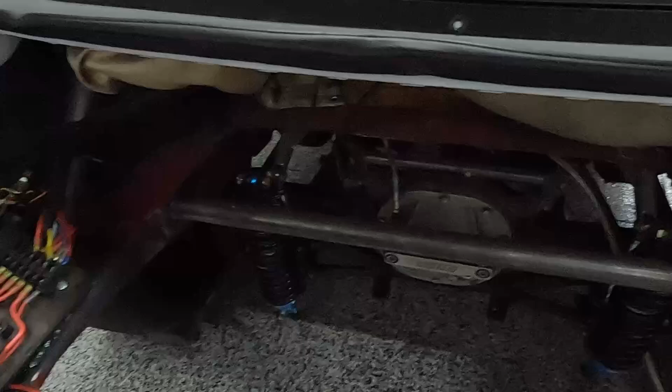So I've done a little bit of preliminary measuring, and I'll take you under the car here. The idea is we are going to build a bar that drops down below the frame rail, goes across, and we are going to mount the cell onto it. Then we will have to come up with a mounting system at the front, something similar.

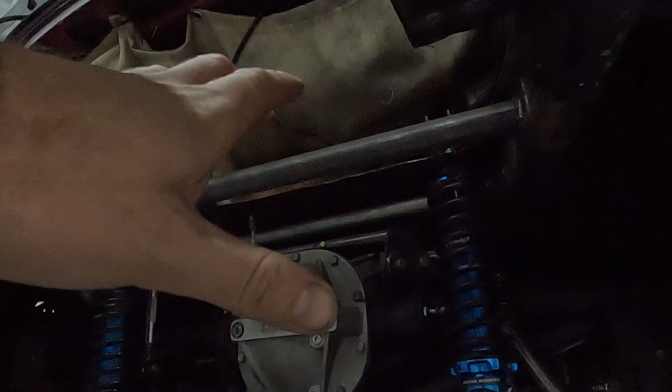My thoughts here are I want the cell a bit lower. I don't want it super high up in the trunk, I want it to really drop down. So the cell and the battery are going to sit back here. I'm just going to get straight to it, enjoy.

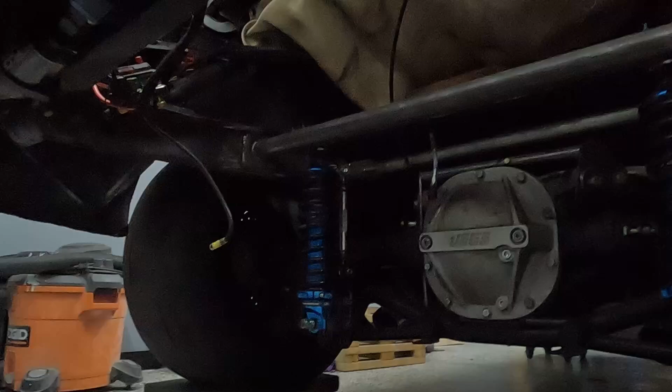All right, so here's our back bar. See, the plates are welded on each side, and we'll go put it in the car.

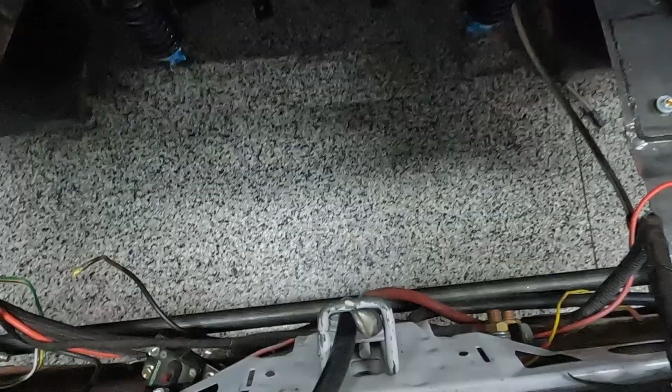Okay, our new bar is in, and now we just have to connect the dots and get our fuel cell in here. So I will tell you this much, I did have another bar that I built with saddles and all kinds of fancy stuff that mounted on the bottom of the frame rail and was down lower. It was a little too far forward, I got ahead of myself. Cell didn't fit properly, so I had to cut all that out. That's why I've gotten so little done, because I wasted a whole bunch of time there.

But as you can see, these two bars are actually fairly close in height now, and we have enough room between the two bars to drop the cell in between it. So we're going to run the cell tied up against this horrible piece of plate that I've ruined, and it should be good.

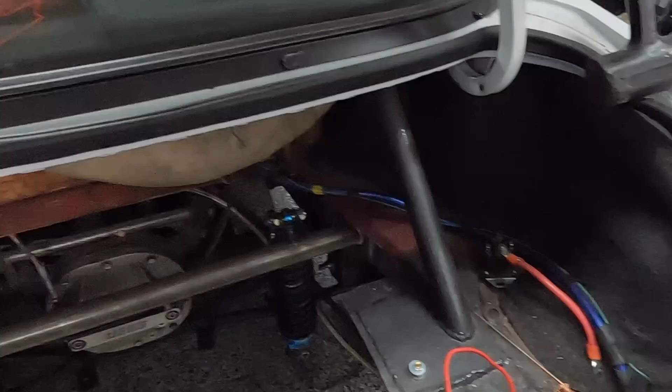One pro tip for you: MIG welder, welding against frame rails, is a lot better, because I got super frustrated and angry trying to use the little guy over there and TIG weld up against here because I had no gas. Definitely not doing that again. So this is going to be essentially a MIG job from here on out. I'll try to TIG onto the bars, the spots where you can see, so it looks pretty.

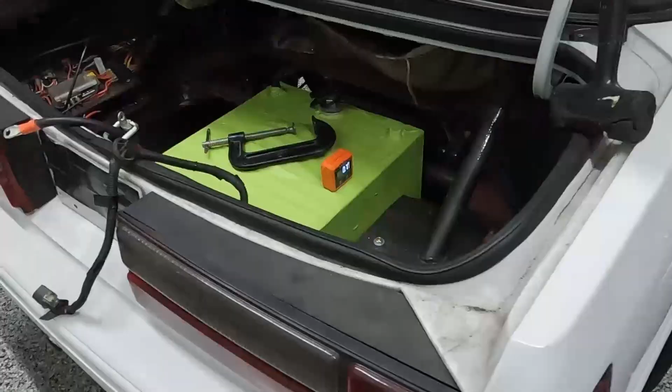So yeah, I'm going to mock the cell up in the car now, and we will see what we can do with that. Alrighty, so we've got the fuel cell in the car, more or less where I want it, and essentially level. We can work on the fine details later.

But now the trick is going to be how we build something to support the cell. So obviously we've got the sump back there. Ultimately I want to run my lines out of the back of the sump, and I'm going to mount the pumps down here. I'm going to have to get a second one of these guys.

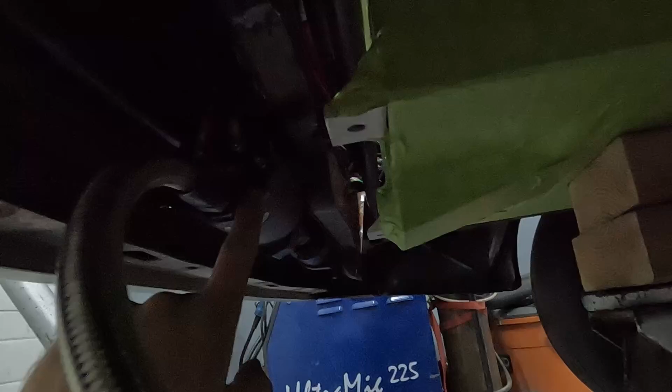So what that looks like is I need to essentially build a piece of tube that comes down to the bottom, along the underside of the tank and up to the top, and the tube will sit on the inside of these brackets, and then we will have some tabs off the tubes that bolt the cell down to it. The cell will essentially be supported on the tubes, and the tabs just hold it there from moving around left to right. I'll take a few measurements here and we'll start cutting some tube.

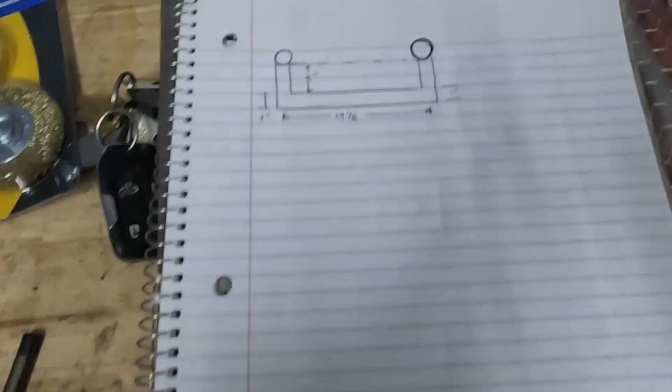Alright, so I did some measuring, and I actually had to double check myself by putting a level under the two tubes, but miraculously these two tubes sit at exactly the same level at the bottom, which is awesome.

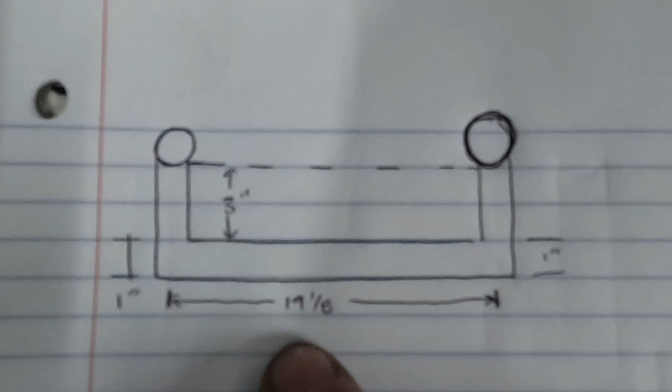So I want this bar to drop down 3 inches. So this piece is essentially 4 inches from where the notch touches. This one as well will be 4 inches. We'll have some 45-degree miters in there, and then we're about 19 1/8 on center, which I will confirm after I have both of these pipes in and plumbed.

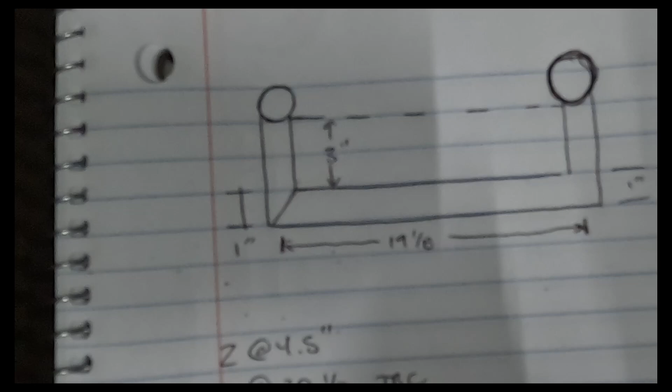All right, so because we know we want 3 inches essentially from the inside—this is really to the bottom of our notch, how I've marked that on the pipe—cut ourselves a short piece with a 45, have my set square up here, moved it so this bottom edge is flush.

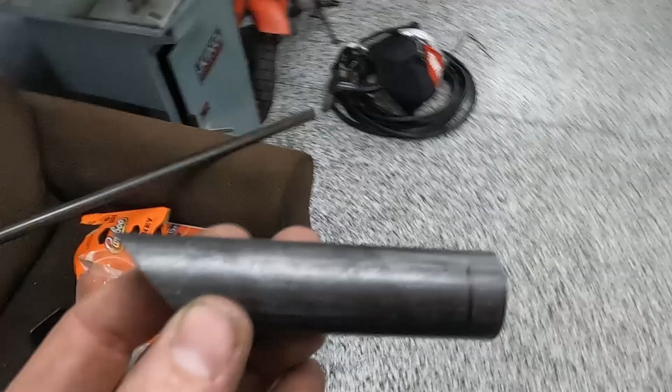Obviously I can't do this with one hand, but I already marked it, and then our 3-inch mark comes in there. So now I know that's the bottom of our notch, which is great. All right, we've got our piece of pipe cut. This inside mark, the only one you can really see where my pinky is, that's my 3-inch mark. Outside of here, I have gone 1/3 of the pipe diameter, so 0.3 inches longer.

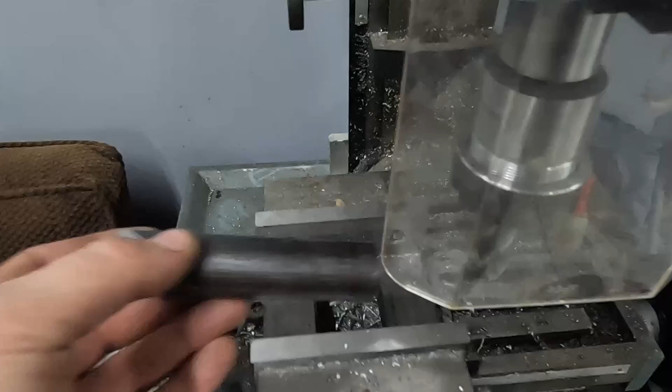What we are going to do is use the milling machine to make a little notch in the pipe, because I'm not good at doing this manually. Lots of people can do this, I can't, but there are videos on how to do it without any special tools. What I'm going to do is square this piece of pipe up in the vise, and I am just going to notch it using the milling machine with a 3/4 inch bit. This needs to be a 1 inch, which I don't have, but I'll just have to smooth over the edges afterwards, and we'll see how it turns out.

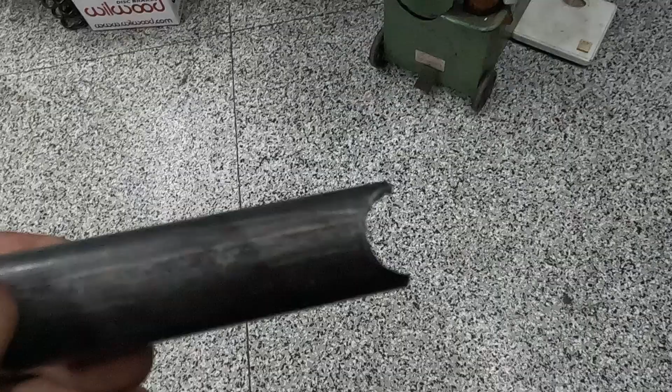Okay, so there is our notch. We are right at the line, so I will just take a flap wheel and flatten this out a little bit so it fits up nicely on a piece of 1-inch pipe, and then we will do it again.

All right, quick little update under the car. I've got the rear tube essentially just hanging out here with the magnet. I've got the front with the magnet. I've measured the distance from that one to that one, and it's about 20 5/8 of an inch outside to outside. So I will miter that tube up and we will mock it up and see how it looks.

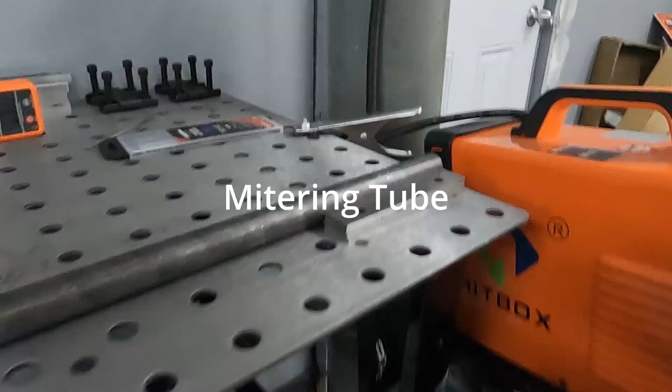All right, we've got these parallels. They are set at 1/2 inch, so I will essentially just mark along the pipe here, and that's going to establish a center line the whole way.

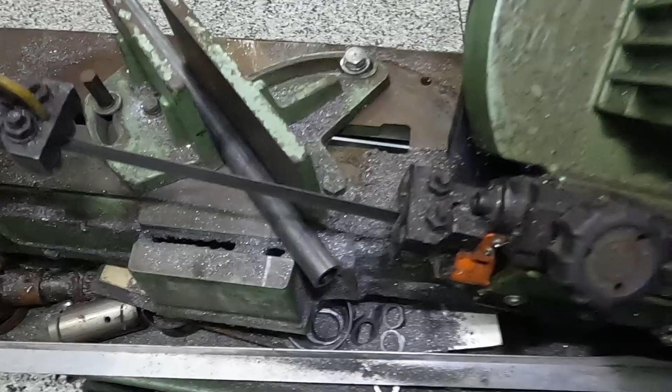Okay, I've got the pipe in the vise, and sorry, it's really hard to see the angle here, but you'll see I've got the line marked with 1/2 inch. I marked the vise 1/2 inch off the base there. So this line now, I can cut this 45 and I can rotate the pipe 180 degrees, and I'll make sure that those two 45s are phased perfectly, and that will make things a lot easier.

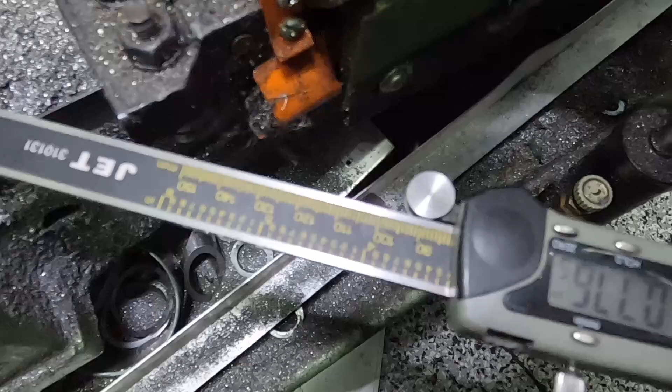Now one more thing, because I want this bar to be exactly 20 5/8 of an inch long, what I can do is I can measure from the edge of the bar to the vise, and I get 0.776 inches. So now I know I mark the long end of this pipe at 20 5/8, which is the overall length I want. I make this mark on it at 0.776 inches, and then I just line up my mark on the bottom with 0.776 inches out, and my pipe should end up being exactly the right length.

Okay, so here are my two marks. That one is the 20 5/8, and that one is where the pipe should sit against the vise. And this line, obviously, that's the one that I line up with the 1/2 inch mark to keep the phase of this bend correct, or this miter.

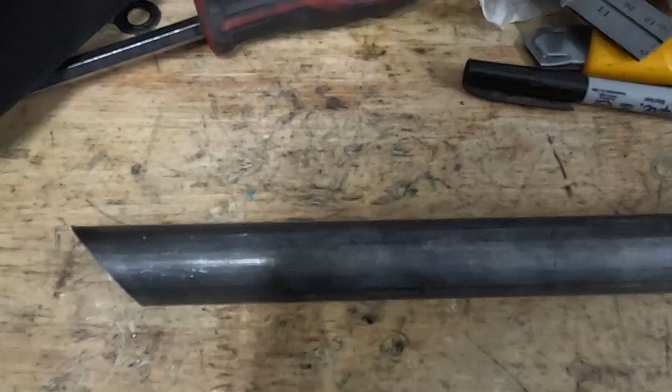All right, pipe is cut. You can see we pretty much split our cut mark down the center, which is unreal. There's the vise mark. The two miters now are perfectly phased. The only reason I'm showing you this is because I wasn't doing this earlier, and that's why I had so much trouble building the first bar. So we will cut a couple more pipes and go on from there.

All right, so what I got here is a piece of tape which I wrapped around the circumference of the pipe. Let me just show you something here. Just one sec.

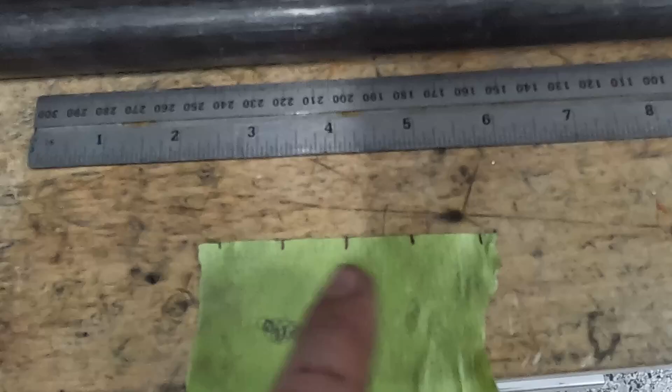So I wrapped a piece of tape around the circumference of the pipe and then divided it into 4 parts. Essentially mark a line, wrap it around the pipe, mark a line on the other side of the tape, unravel it, and divide this up into 4 pieces. Go back to your mark on the pipe, wrap it around, and put 4 marks on it, and this is going to be for our notch.

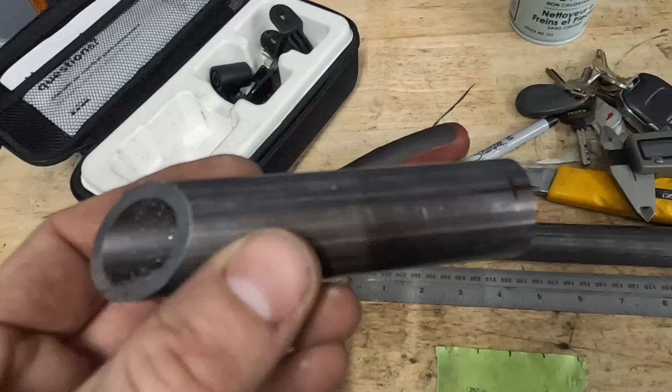Because I'm mitering this end, the notch has to be in the correct spot, obviously. This piece is going to sit on a piece of 1 5/8 pipe. So I will mark out the notch and show you what I've done.

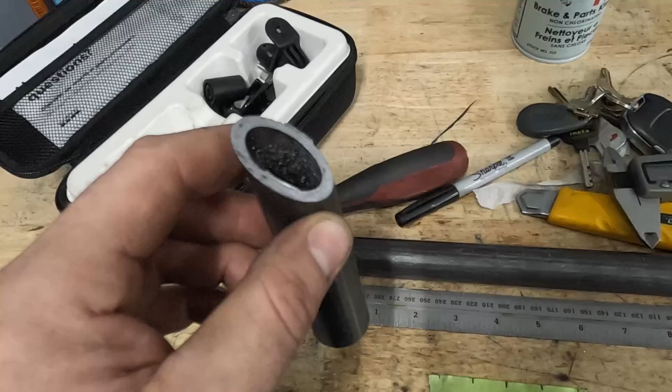All right, so here's what I did. I essentially put the pipe on here, and you'll see on the side here, that gap was like around 4 millimeters. So on the pipe, I marked a 4 millimeter spot. Each one of these marks is at 4 millimeters, and all you do is take your 4 marks and connect the dots. These are just straight lines.

What I'll do now is take an angle grinder and grind out all this spot in the middle here, and that will make the saddle for this to sit on. There's a little bit of fine tuning after, but this works pretty good. This is what really frustrated me yesterday, to figure it out, and once I figured it out, it's been going better.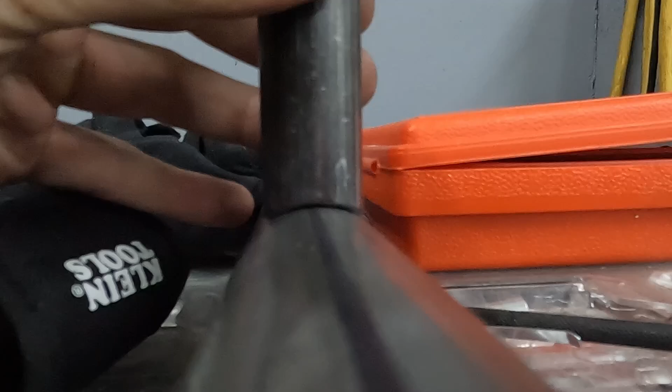You can see that worked pretty good, it's a pretty tight fit up. It's not perfect, but it's good enough for this. So what I'm gonna do now is tack all these bars together and go mock it up on the car. All right, got her mocked up.

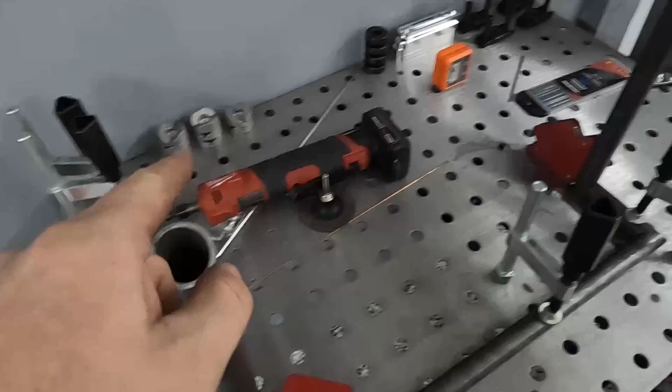Shout out to Princess Auto, which is kind of like Harbor Freight but the Canadian version. Got this new welding table for 200 bucks. It comes with all the clamps, fixturing - those are V-groove clamps, there's spacers for them, bolt down stuff. But I can pretty much mock this whole thing up right here, tack it together, and make sure I get the notches oriented right, and then we can try it on the car.

Well, it didn't fit, so I cut it, and then I cut it too much, and had to add some back. But all in all, not too bad. So we'll put this in the car, and I guess we can start mocking up the fuel cell.

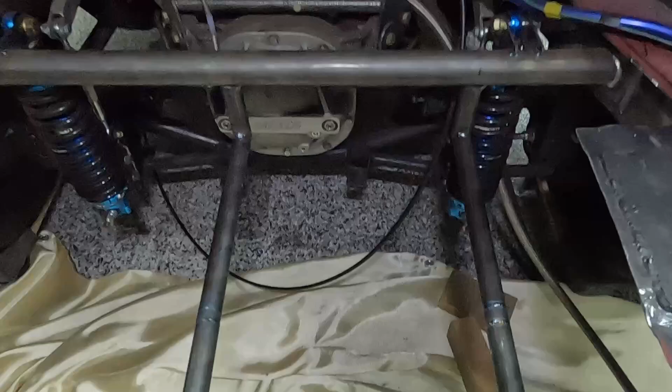Okay, and those are the 2 bars in there now. See, they are tacked up and they're going to allow the fuel cell to drop down. Now, unfortunately, the orientation of the tabs on the fuel cell isn't correct, so we're going to have to re-weld those, but see if we can fit it in here.

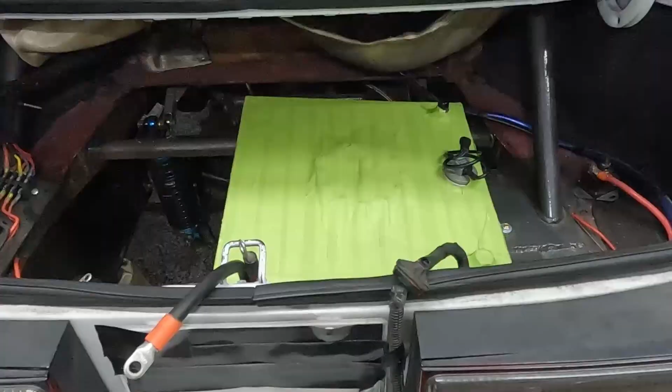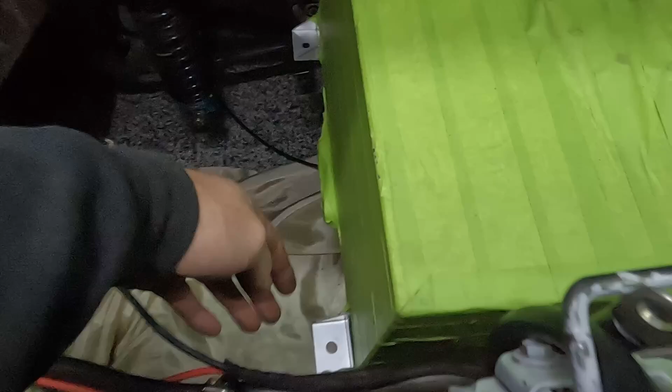Okay, first mock-up, obviously the tank is sitting on the sump. This sump needs to rotate this direction. Obviously this whole tank will be spun 90 degrees, and then those tabs will go on the sides, but you can see now kind of where the tab will mount.

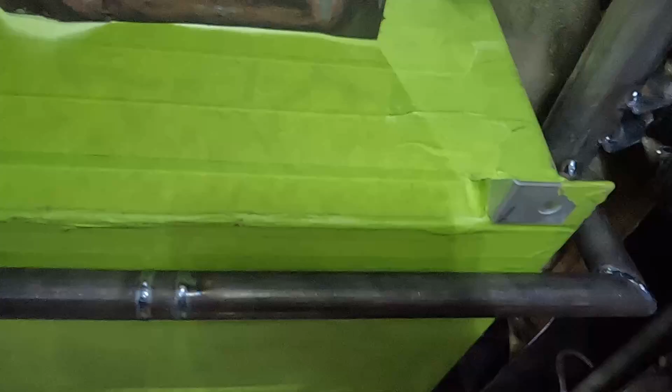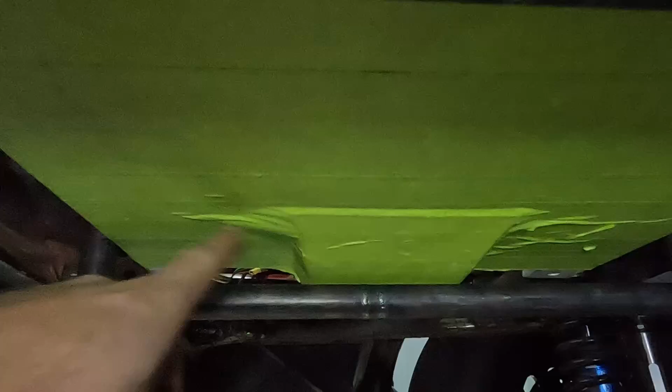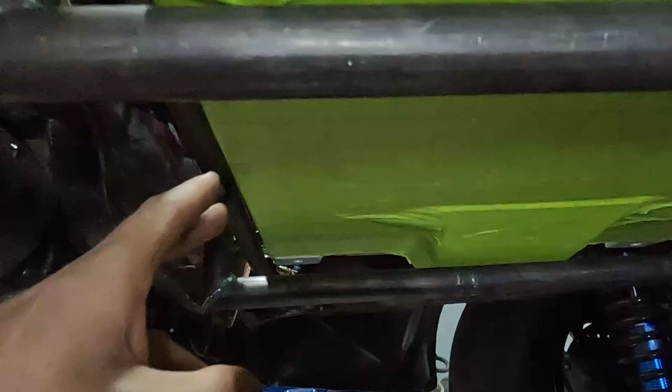Show you under. So under the car, we'll have to center the cell on here, but we'll make some tabs off of here, and that's where the cell will bolt to, and the bottom of the cell is obviously going to be supported by here, and again that sump sitting down is going to be out here, and this is going to be further forward, so the sump is going to hang out right at this point here. The interesting thing is, this tank is a square, so with this all the way forward, I know the sump is going to sit exactly here. So that gives us a bit of space for some fittings.

And I'm thinking my fuel pump, I'm going to need a second one of these guys. I'm thinking we'll make some more tabs under here, and we'll mount the 2 pumps right under here, and each line will come out of the sump and feed them.

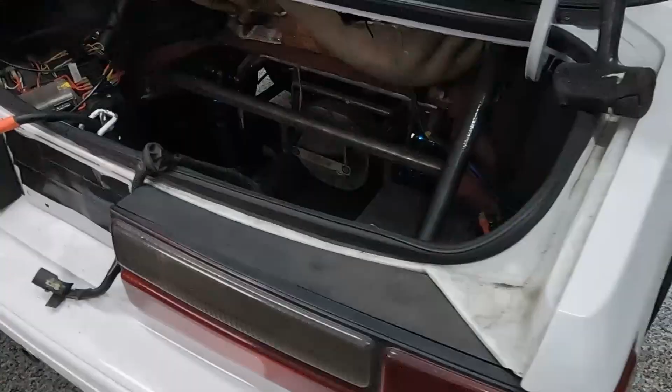All right, so for the cell to fit in the trunk, the tabs need to be on the sides at the back, and the front we can have the tabs facing this way. So what we've got going on here, I have welded on just some plates to build it up here, and now I'm gonna make a little tab that comes off the side.

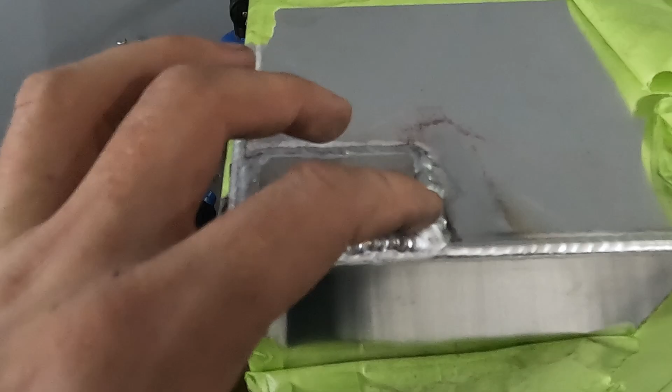And yes, it looks like a little kid welded that, but it's really hard for this welder. It's welding, this is 1/8 plate, to 1/8. So I'm like preheating it with a torch and stuff. It seems to be working.

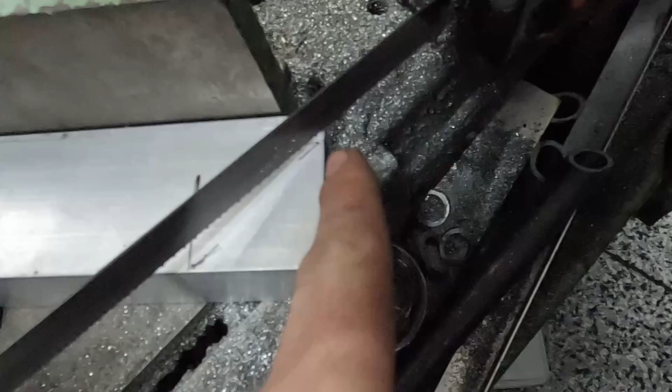It's gonna hold at the end of the day, but it's not beautiful. This end is obviously open. It's gonna give us a tab that's about 1.5 inches tall. The straight part will stick out, and this is about 2 inches long. So this will weld to that backer plate I had.

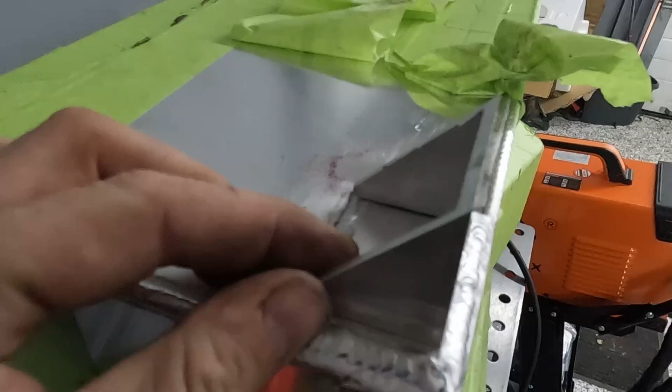So this is our new tab, and it's just gonna hang out on there, and I will do my best to weld it around, and hopefully it sticks.

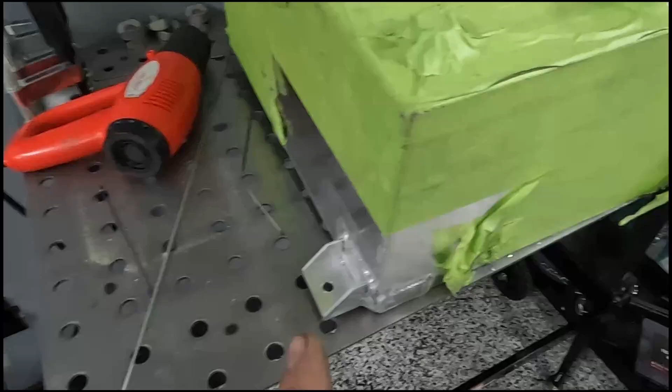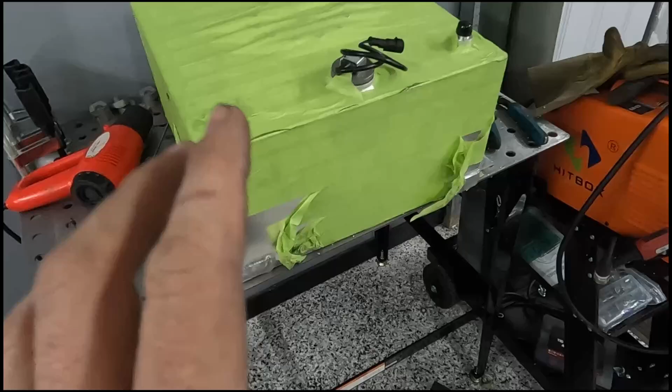All right, these are done. They look good from the top. They look absolutely terrible from the bottom. This little guy, he struggled. Truthfully it was probably me and not the machine, but that 1/8 plate to 1/8 plate on 1/8 plate is not good for a little guy like that, and someone like me who doesn't have a ton of aluminum experience. But they're there and they're stuck on, and the tank's going to be supported underneath with straps, so really these are for shear support side to side. We also have 2 factory welded tabs up here as well, so I'm not concerned at all about the safety of this cell. It's just kind of one of the ugliest things I think I've ever welded.

All right, so we have now got the cell in the car, and you can see now it sits down nice and low, which is what I was hoping for.

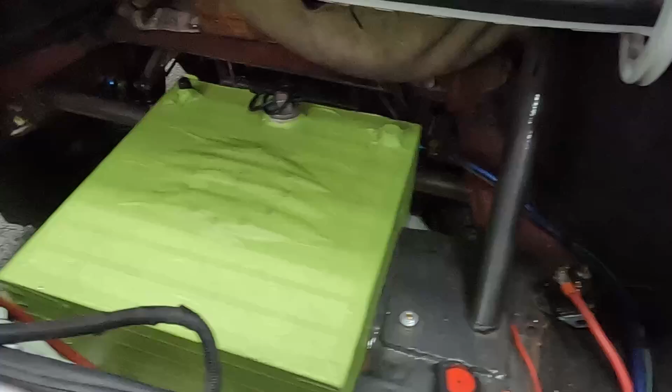And under the car it looks like that. We've got 2 bars, and we'll just need to make some mounting tabs off of here. But I think that's pretty straightforward now, and overall I would say I'm happy with it. So I'm gonna make some mounting tabs for this, and then we will go on to the battery.

I have got the second tube welded on and in place, and I've tacked these in a couple different spots, played around with the cell. The idea now is that this bar is going to help support the battery as well. So let me put the cell in and we'll have a look.

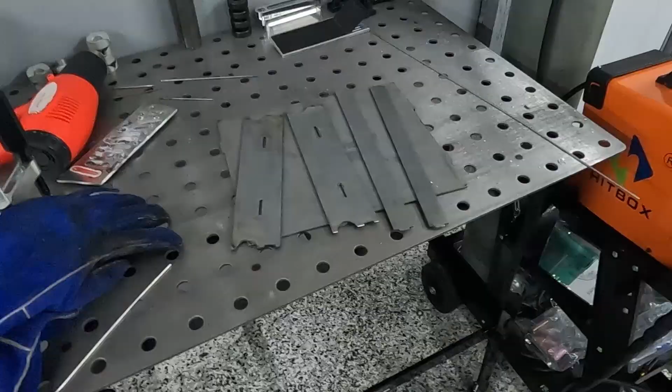Alrighty, on to the battery box. Now I made this in CAD, and my buddy Blake Lyons over at Lyons Autocraft, who's actually going to be LS swapping a DeLorean soon and starting a YouTube channel, cut these out for me. What I've done is, this is a battery box, and it's going to sit between my 2 rails back there. The tabs essentially clip in. So this should be a pretty interesting piece, and I'm pretty excited to try it out.

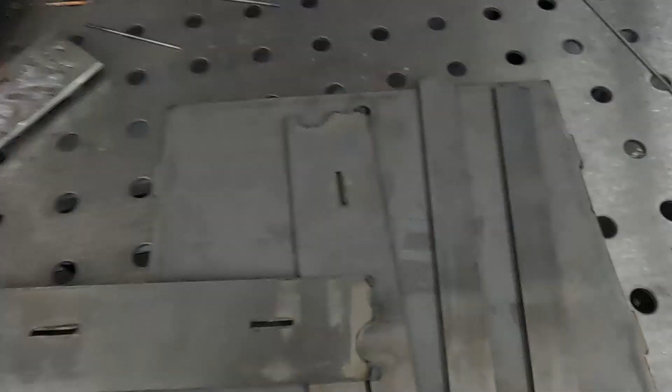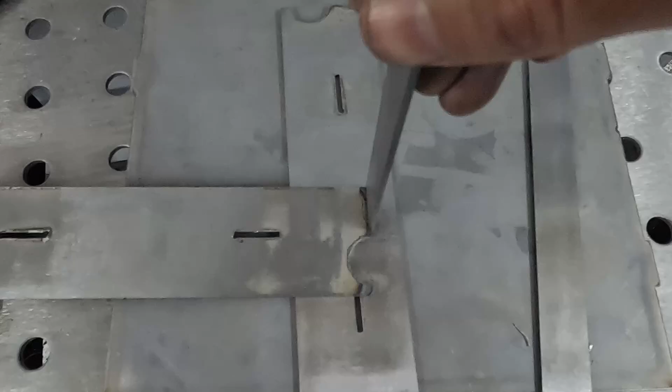So let me show you how this gets assembled. You'll notice these little square notch-outs that don't look square from there, but the pieces essentially will clip in. Essentially I will tap this all together with a hammer, tack it all up, and we will have ourselves a battery box.

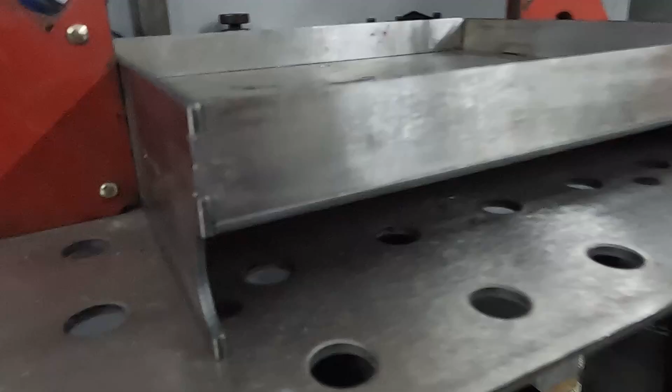Alright, so here we are. Got everything tapped together here. This is actually insanely good. Look at how the edges meet up there. Pretty surprised this is working as nicely as it is.

So I'm gonna go ahead and just tack this thing up and then try to figure out how I actually want to weld it.

Alrighty, there we go. So what I did is just a couple stitch welds, miscellaneous stitch welds and corner welds - sorry, that chair is very noisy - but that's what we ended up with, and I am very, very happy with that. So thanks again to Blake. When he starts uploading videos on his LS DeLorean build, maybe I'll direct you guys over to his channel. He's just got to make one.

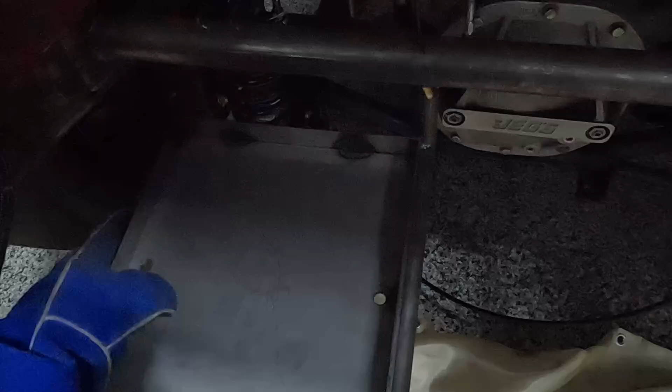And in the car, that's how this looks. It'll sit on this bar, and I'm going to make one more bar by my left index finger over there. But yeah, that's the basic idea.

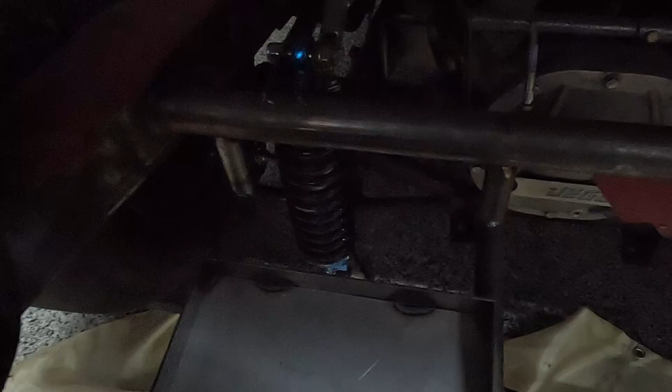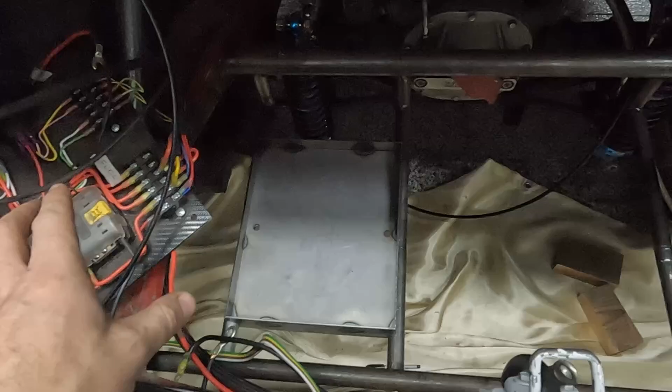Okay, we're almost done with this nightmare. The last bar tacked in, which is this guy here. You can see the battery tray fits super nicely in there. I just measured it out. My fuel cell tab is going to go right there and right there. So yeah, that's pretty much how this trunk is going to look. We'll have to figure out what to do with this wiring and how to rearrange everything.

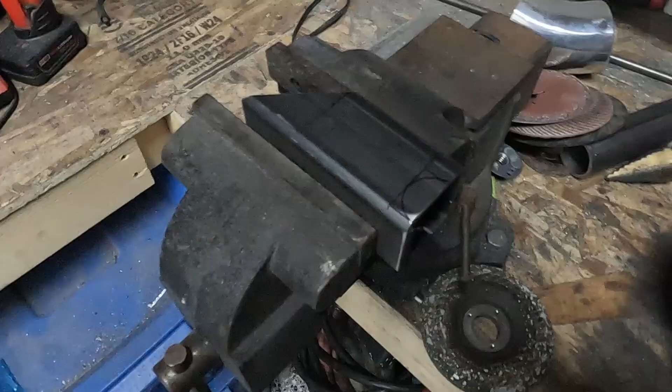Alright, just making some tabs here to mount the fuel cell to the tube. You can see I've got our mark for where the tube needs to go. What I'm going to do is cut a whole bunch of thin slits with the zip disc, and then we'll grind it out smooth, because I don't have a hole saw that size.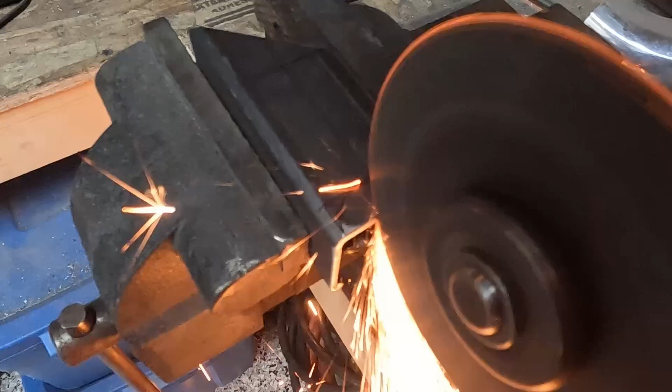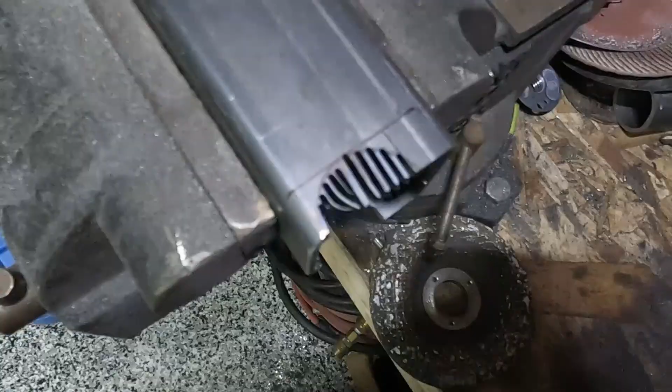And that is what that looks like. Now I will just use the grinding wheel essentially, and you'll see these tabs will just come out like nothing.

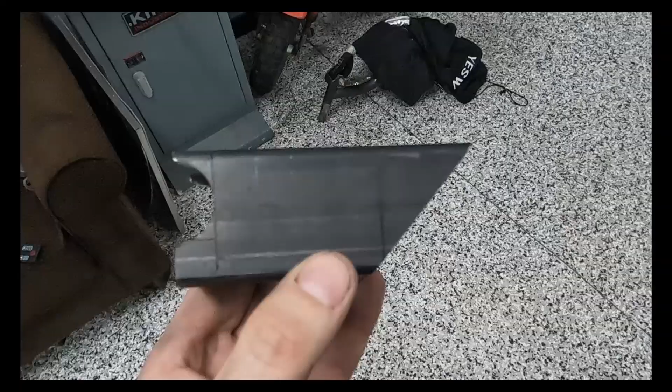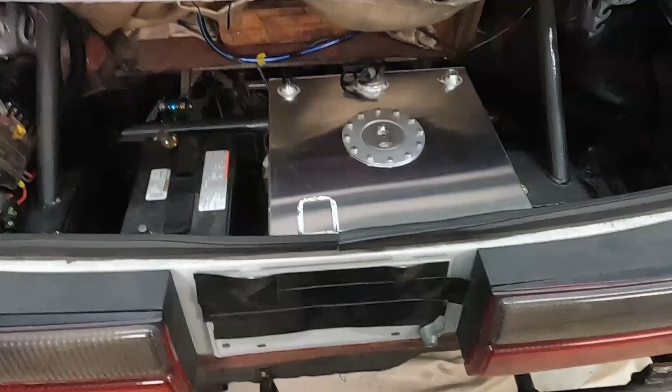Alright, tube is notched, so we can go and tack these into the car now. A bit of finishing work off camera, but this is essentially the final product. So you can see I got everything just painted in here. This is that Tremclad hammered paint. So this is kind of the final product. I went through and painted the bars and everything in here with this hammer paint. It always works out super nice, and it almost looks like powder coat.

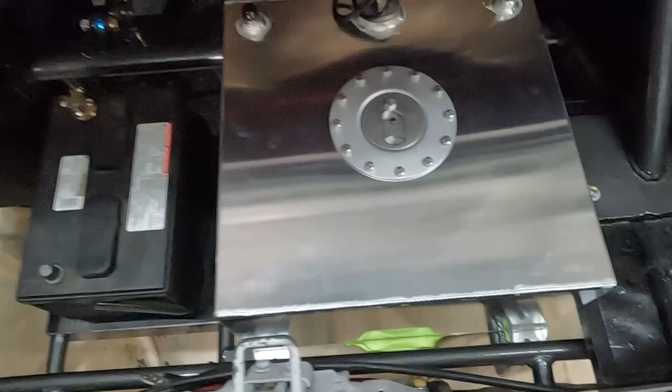So you can see we've got the battery sitting in the tray. I still need to make a little hold down for it, but that's no problem. The tank is in, you can see it's sitting on some mounting tabs I put in. So that all turned out well. This thing sits nice and low, which is what I wanted.

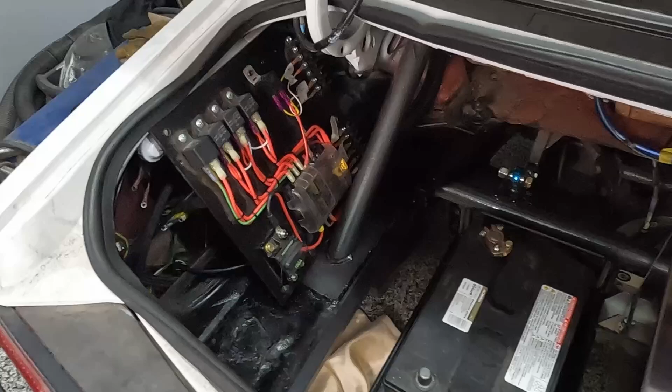Our electrical panel we will mount over here somewhere. I have a ton of wiring and stuff to rejig back here. I also need to run some wires from the computer back. So I'm gonna have to figure out when I want to do that and how I want to do it.

I also trimmed out the edges just with some aluminum angle iron, just to soften them up so they're safer. You can brush your hand against it and you won't get cut, and it just looks a lot nicer.

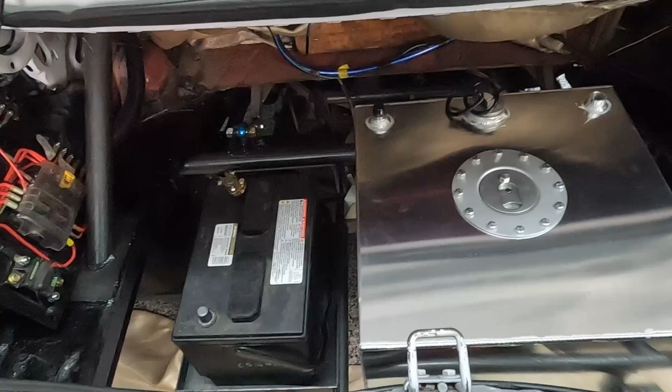Obviously there's still a little bit of work to do up at the front. I'm gonna need to build a firewall in there. I've just got a welding blanket hanging out there so it doesn't destroy my interior with all the angle grinder dust. But yeah, I think that's probably the next thing that I'll end up doing. This video is starting to get pretty long, so I think I'm just going to call it quits now.

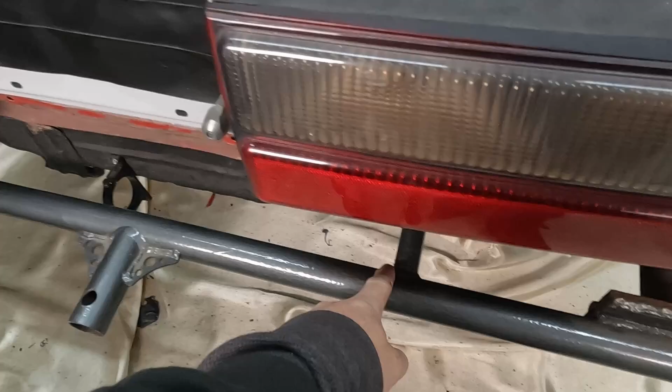You can see I also reinforced the chute bar, just reinforced it back up to our bar here. So the chute is held on by those bars over there and the struts, but I figured, you know what, while I'm back here, might as well throw another one on there.

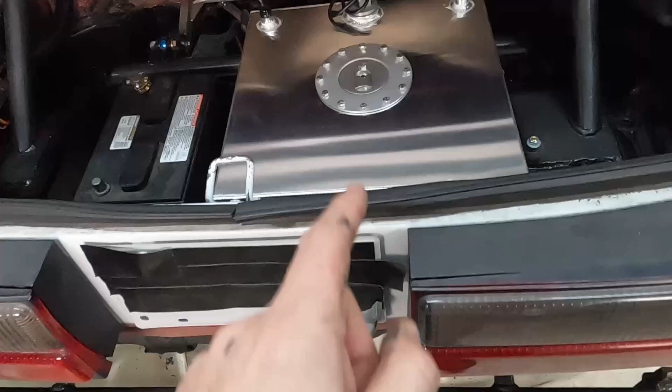I removed the external fuel pump. We are going to be getting a dual hanger hat for this and running two pumps out of the tank, and I can modify it for a third if I need to. The only reason I want to do that, well, I can either pretty much sell the pump I have and just go buy that dual setup, or add a pump to the one I have. So I'm like, you know what, I'm just gonna get the duals. It's less work, it fits in the tank properly, it's just a lot easier, a lot cleaner.

So yeah, we'll have to start doing some plumbing on here soon as well. But yeah, I'd say that's gonna be everything for this video. So this is a big process, it took a lot longer than I thought. I thought this was gonna be super quick and easy, but it definitely wasn't. But I also took my time with it and really wanted to make sure I had something that looked really good as well as worked really good.

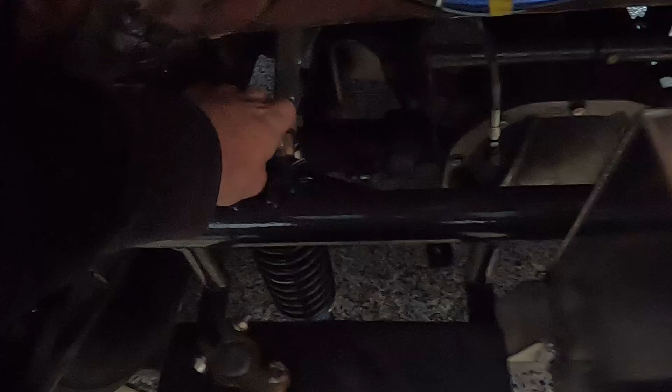You just see logistically, like if I need to adjust my shocks, the extension, I can easily do it from in the car. It's just a lot easier to get at everything this way with everything low. You know, if I had the cell mounted up really high, it's just not quite as easy.